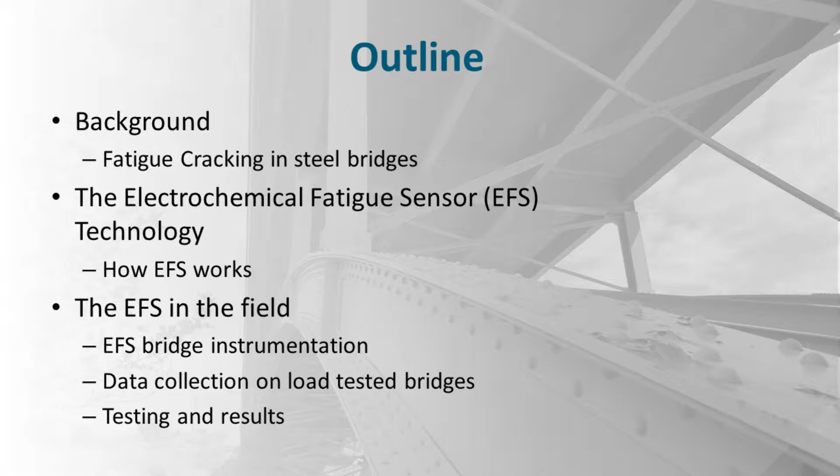So first, I'm going to give you an outline of what my presentation is going to be. I'm going to give you a background on the current state of steel bridges. I'm going to talk also about the electrochemical fatigue sensor, the new technology that we're using to detect structural damage and verify repairs like retrofits, and also I'm going to go over how it actually works. And towards the end, I'm going to present a field study that we did with this technology.

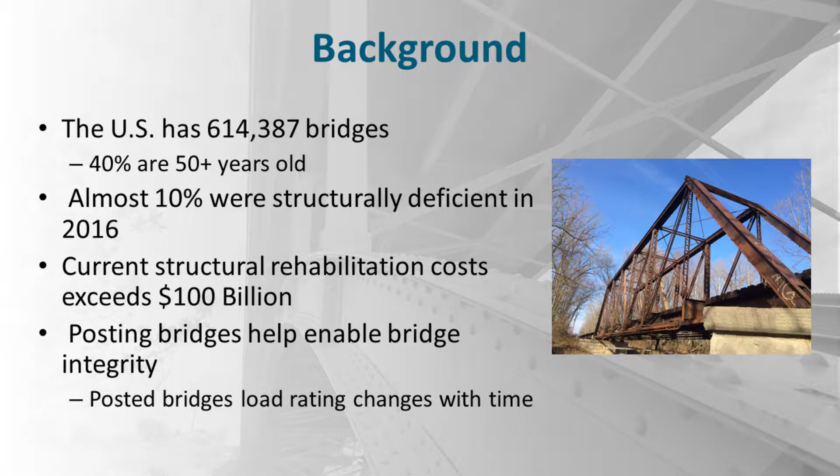But as you know, the U.S. has over 600,000 steel bridges, and 40% of them are at least 50 years old, and almost 10% are actually structurally deficient. In order to rehabilitate these bridges, it would require a lot of money. So usually what we do, instead of investing a lot of money in repairs, one way to go around that is actually posting the bridge. So we limit the amount of load that it can actually support in order to preserve that bridge, in order to make it last longer.

What are some of the forms of damage that can occur in a steel bridge? Well, one of them that we're actually going to be talking about is fatigue cracking. Recently, the big companies are trying to increase efficiency. So what they do is, they say, well, let's put more loads in our trucks. They have little concern for what they actually do to the infrastructure. The result of that is accumulation of cycle loads and heavier loads on the steel bridges, making them fail sooner than expected.

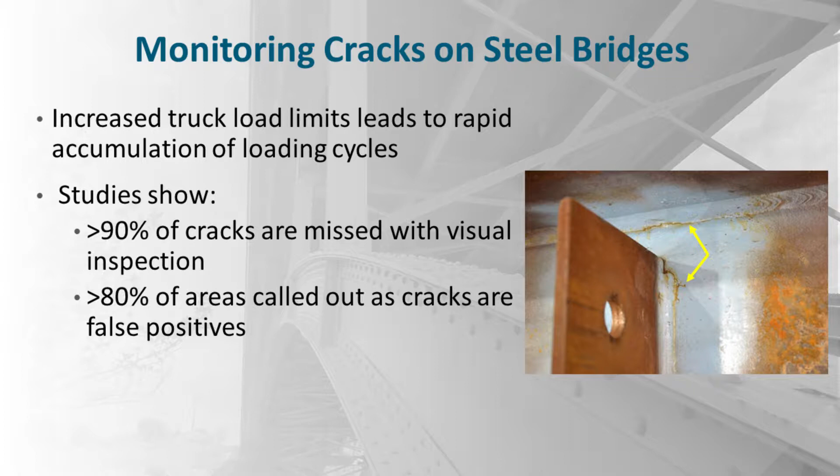So the first step to find or monitor cracks is by visual inspection. So we go to the bridge, we send a person either using binoculars or from very far away, trying to detect all the fatigue damage or fatigue cracks that a bridge has. But a study has shown that 90% of those cracks are actually missed by visual inspection. And 80% of the areas that are called out as having cracks, they're not.

Now that we have identified cracks, what do we do next? Do we know if it's actually active or dormant? So usually what we do is just wait for the next inspection period in order to mark where the actual tip is, and to report back if it is actually growing or not. Or if you put a drill stop or a retrofit on it in order to arrest the crack propagation, we have to do the same thing. So we have this technology called the electrochemical fatigue sensor that is going to give you that information in a matter of minutes or days, depending on the loading going over the bridge or the structure.

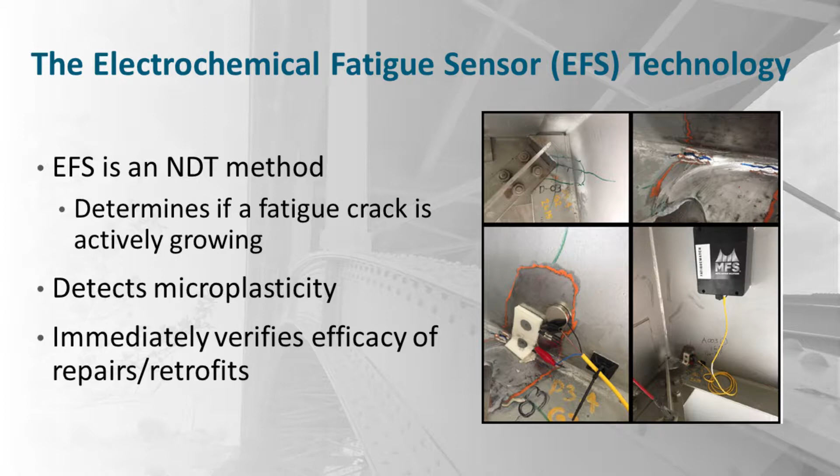So what is the electrochemical fatigue sensor? Well, the EFS is an NDT method that can determine accurately if a fatigue crack is actively growing or not. It can also detect microplasticity, which is a precursor to cracking. It can also immediately verify the efficacy of repairs and retrofits.

One thing that you can do is make a plan of what retrofit or what repair you want to use, and instead of deploying that fix to the whole bridge, you can actually test it and see how effective it's going to be. You can have different sets of fixes and see which one is more cost efficient, and verify with this technology if the problem, in this case fatigue cracking, is being solved by those.

So how the EFS works. The EFS works very similarly to a medical electrocardiogram. It reads electrical signals coming from the bridge. How do we read that electrical signal from the bridge? So what we use is a sensor, and we put some electrolyte in it, and we apply a constant voltage and read back a current.

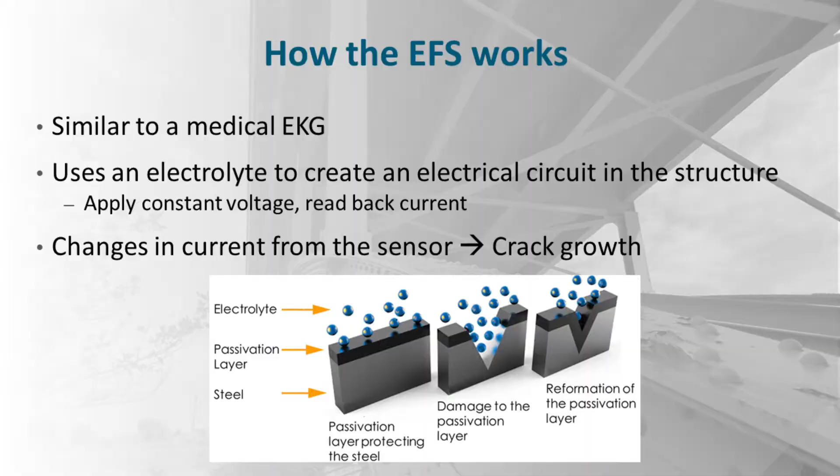What the sensor reads back is once this passivation layer has been broken or stretched out. As you can see in the second part of that figure, a crack has been formed. When a crack has been formed, new steel is being exposed. That makes the electrical signal change significantly.

And once it's been exposed, the passivation layer reforms again. And this goes back and forth, back and forth. The passivation layer breaks when you have a significant loading and the crack is growing, and reforms again when the load has actually come back to what it was.

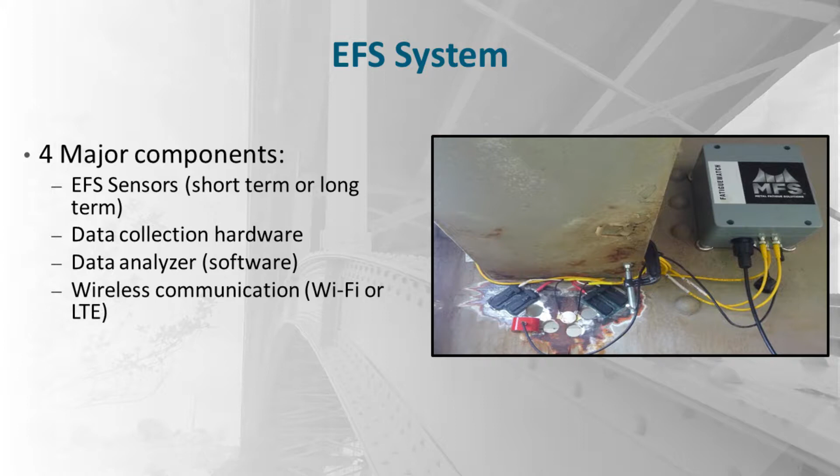The other one is the data collection hardware. That is the gray box that you see on the top right of the picture. And the data analyzer, that is the software that analyzes all this electrical signal coming from those pairs of sensors. That is actually not shown in the picture, but it's that black wire connected to the gray box that is somewhere else near where the inspector is. And the wireless communication, so you can monitor or assess the activity of the crack remotely.

So why do we need that? It's because the passivation layer is really sensitive, so it will also pick up elastic deformation. But when plasticity or the opening of the crack is occurring, that electrical signal is significantly different from the signal that you get from elastic deformation. So by comparing those 2 signals, we can say if a crack is actually growing or not.

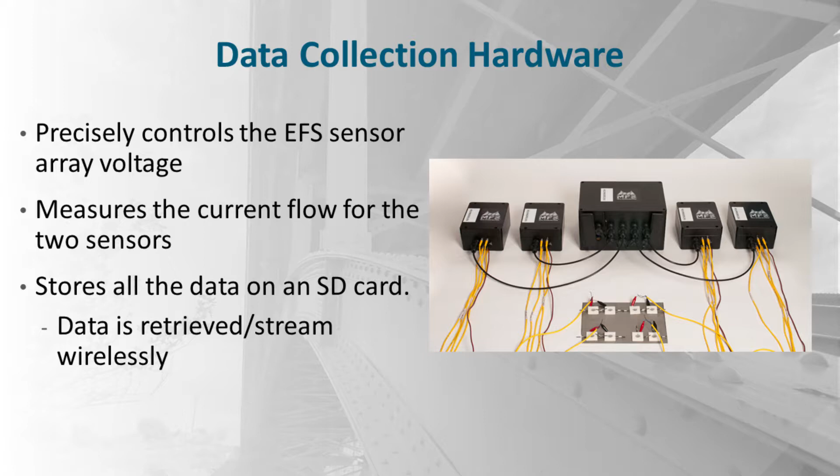So then we have the data collection hardware. That is, in this case, that black box that precisely controls the EFS sensor array voltage and measures the current flow from the 2 sensors, or however many sensors you have installed. It also stores all the data on an SD card, so you don't have to babysit the system. You can just let it run and come back for the data, or retrieve that data wirelessly.

The data analyzer is the one that does pretty much the job, and it's going to tell us if the crack is actually growing or not by comparing those 2 signals. When we compare those 2 signals, we have what we call the energy ratio of a crack. The energy ratio of a crack is the area under the curve of the sensor that is on top of or near the crack over the area under the curve from the reference sensor.

We have thresholds for that. If the ratio is from 1 to 1.5, the crack is not actually growing, it's just experiencing elastic deformation. If that ratio is from 1.5 to 1.9, it's showing microplasticity, a precursor to crack propagation, and above 1.9, the crack is actively propagating.

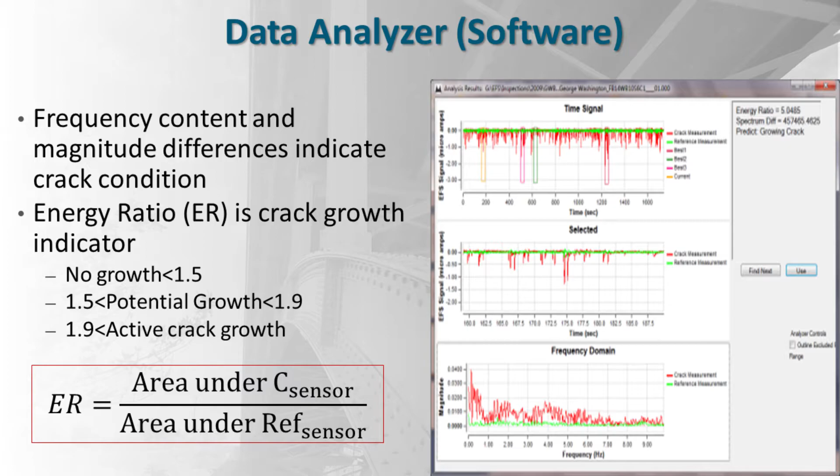But in order to see this a little bit better, we actually represent that in a frequency domain. That's the last picture on the bottom. You will see that the red line is significantly bigger than the green line, meaning that in this particular case the energy ratio was 5.04, meaning that the crack that we inspected during this monitoring job was actually significant.

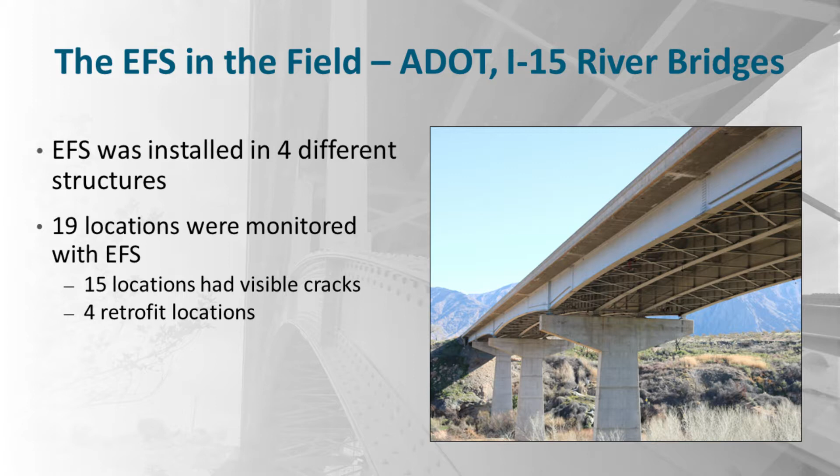The EFS on an actual field. So we have a project with the Arizona DOT on the I-15 river bridges where we actually inspected 4 different structures. And in those 4 different structures, we had 19 locations monitored with the EFS, 15 locations had visible cracks, and 4 retrofit locations were inspected as well. These locations were selected by ADOT and the team executing the project.

EFS Installation Example. In this case, as you can see, is the short term sensor. That's why it's a white foam. And it was located on a longitudinal crack in a girder web near the top flange. As you can see, the first step to install this system is to remove the paint to make sure that the electrolyte is in direct contact with the steel.

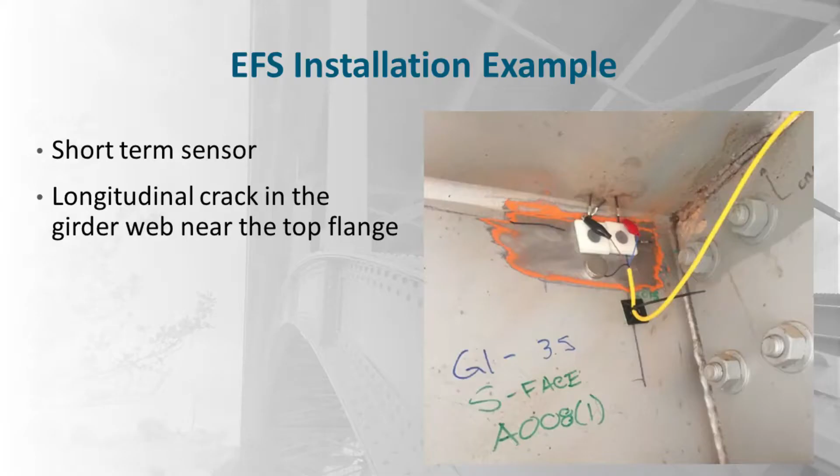In the pictures, we put all the notations in there, like crack length, location, and the date when this location was inspected. And also at the end, when the sensor is being removed, the whole thing gets repainted again, so we don't have corrosion problems or any other problems with the asset owner.

Well, now that the EFS has been installed, what do we need to do in order to get some data? Well, we have 2 options pretty much: ambient traffic or do a roll test. If a roll test is an option, that will give you the results right away. If you use ambient traffic, we have to wait for a significant load to go over the bridge in order to get an accurate reading from the sensors. But in this case, we actually did both. We gathered data under ambient traffic and also a roll test.

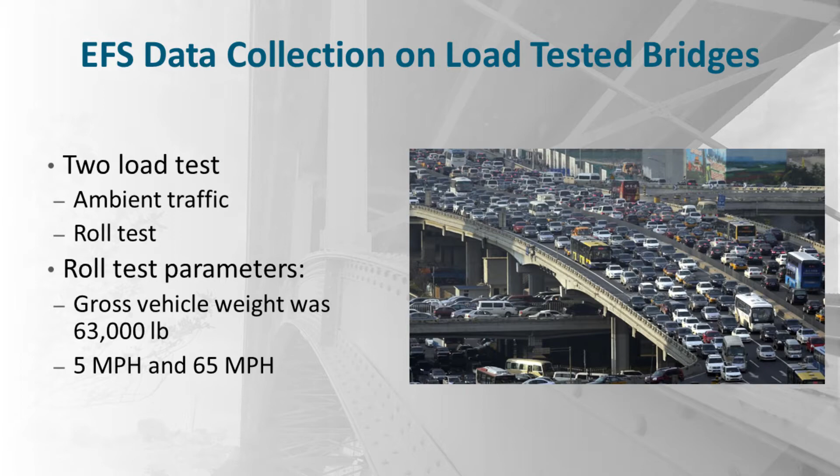For the roll test, we used 63,000 pounds in weight, and we used 2 different speeds: 5 miles per hour and 65 miles per hour. What were the results of this test? Well, the first one is the roll test at low speeds did not provide usable data. When the vehicle goes very slow, the passivation breaks and reforms quickly. So if the truck is going very slow, the sensor will detect it almost like a quasi-static loading. So the passivation layer will have time to reform, and the reading coming out of that won't be very accurate.

But I don't think we have that problem in current days, since all the people seem to be in a hurry, so they're always speeding. So we're fine in that regard.

But the results from the actual 19 total cracks: it was successful. From the 15 visible cracks, 4 locations were actively growing, 5 of them show potential to grow, and only 6 of them were not growing. With this information, you know how much damage you are putting into the structure, and what locations are getting most of the damage due to the ambient traffic or the rolling test. And use this information to load rate the bridge if necessary.

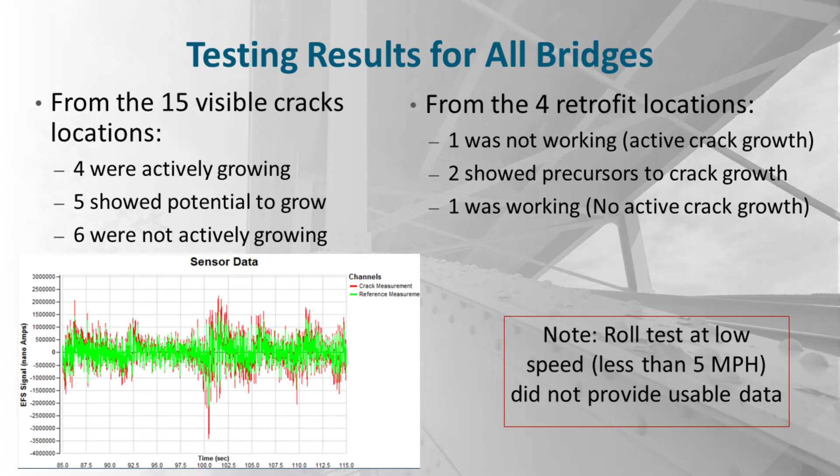And then we have the results from the retrofits. The first retrofit was not working. It showed that the crack was still growing, so the repair did not work. 2 of the other repairs showed microplasticity, meaning it had a potential to grow. And only one of them was actually fixed. Out of these retrofits, the first one was a weld retrofit. The two that showed microplasticity were drill stops, and the last one was a cutout, the one that seems to work.

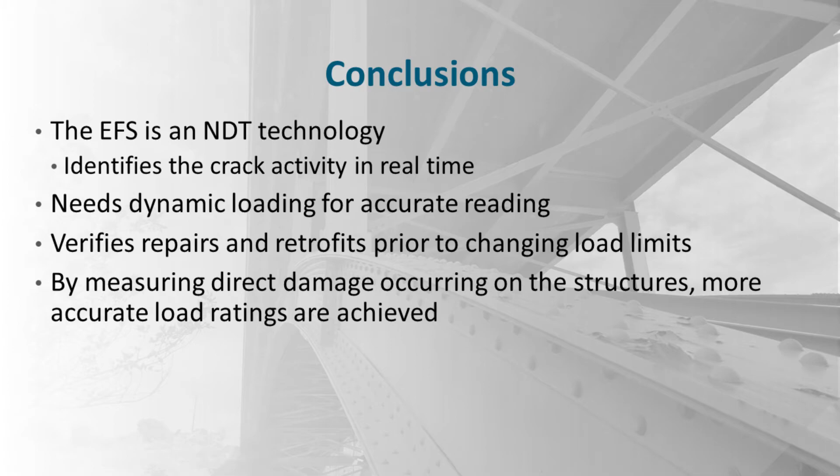So the conclusions after the study: the EFS is an NDT technology that can identify cracks and the activity of the crack in real time, it needs dynamic loading for an accurate reading, and it can verify repairs and retrofits prior to changing the load limits. And by measuring the direct damage occurring to the structures, more accurate load ratings can be achieved.

That was clearly a crack due to small web gap. Yes.

What was the retrofit before you did this monitoring? Could they have put some sort of plate from the stiffener to the flange and bolted it to make that a stiffer connection? We don't do the retrofit. We actually go and verify the retrofit.

Well, the first step is to know if the crack is growing or not. So if the crack is not growing, there's no point of doing the drill stop, right? Once the drill stop is done, you can actually have an option to monitor that location if that's your desire, and put a sensor in front of that drill stop to monitor that location. Well, from an owner's perspective, you might choose to just put an arrest hole and not take the chance. It depends on the redundancy of the structure and such.